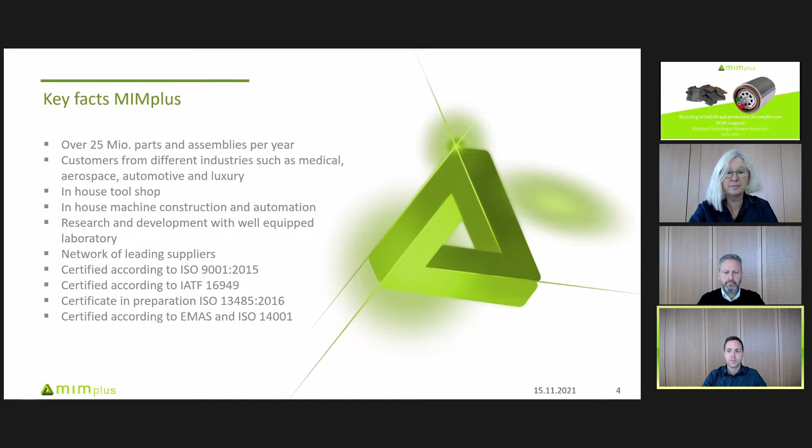So, the topic of our today's webinar is recycling of NdFeB and production of complex new MIM-magnets. I'm handing over to Carlo now, and enjoy the presentation.

Well, thank you, Sibylle, for the very nice introduction. It's a pleasure for me to talk today about the criticality of rare earth materials.

First, a little overview of the University of Pforzheim, which is one of the largest universities of applied science in Germany, with about 7,000 students on a campus overlooking the city of Pforzheim, with very new buildings. We just moved house with our institute from what you see down here to a brand new building. It is my pleasure to cover the third floor completely with our institute, which is called Institute for Precious and Technology Metals, short STI.

And our institute is based really on three columns. One is the contractual research and industry support. Here we have an accredited materials lab with a wide range of different technologies, ranging from high resolution to SEM to very specialized testing methods for the local precision and also the jewelry industry.

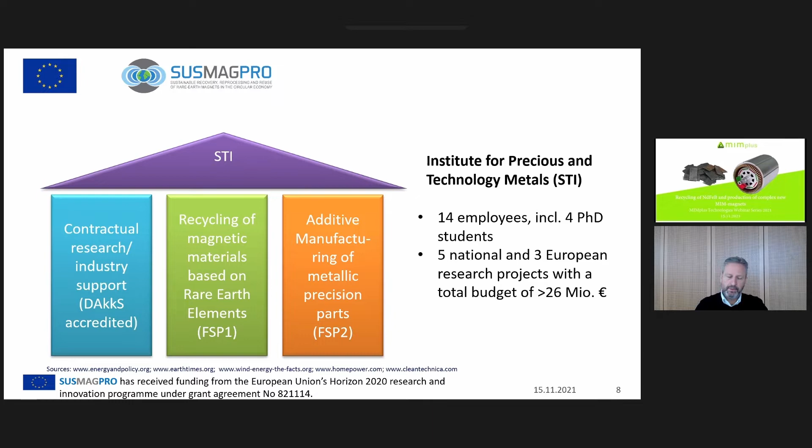We have 5 national and 3 European research projects with a total budget of more than 26 million. And well, I'm coordinating the largest one, which is SUSMAGPRO, which is sustainable production of magnets, or sustainable magnets production, to bring it in the right order.

And we are covering this subject because there's a real need to look into the recycling of rare earth materials. Because first of all, the green energy, and you know the discussions about the Green Deal we're having in Europe and about climate change, and green energy comes with a material revolution.

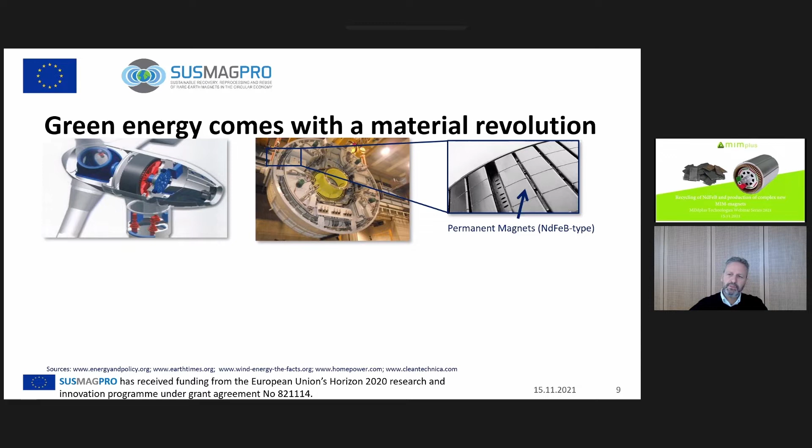There's a lot of talk about lightweight material, about composites, but a material that's really critical are the permanent magnets. And if you look into a wind turbine, you see in modern wind turbines, more than 2.5 tons of these magnets built in, so roughly about 650 kilograms per megawatt of power installed.

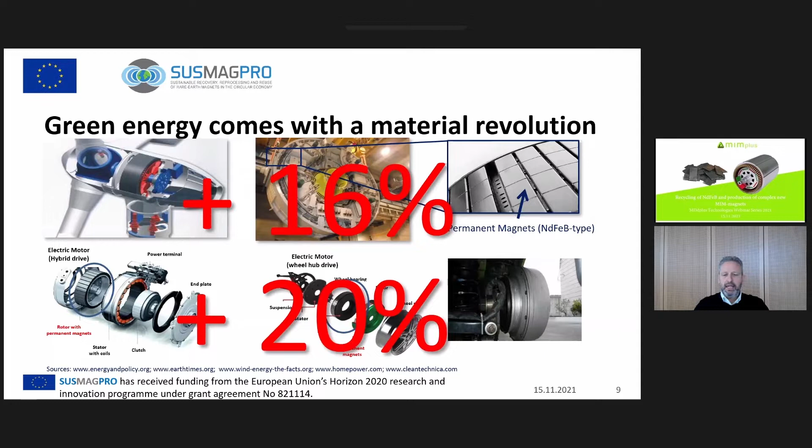If you look into mobility, in hybrid drives, you have about 1 kilogram of permanent magnets. In full electric cars, it can be up to 3 kilograms, so a much smaller weight per unit, but of course much larger quantities. And the growth rates in both areas are quite large. In wind turbines, currently about 16%. In electric vehicles, it's currently more than 20%.

If you look a little more into the newly registered electric vehicles, you see that in the last year, despite the COVID crisis and also systems like car sharing and so on, we have a massive growth in electric vehicles, which, if you look into the development cycle, leads us to suspect that we're in a kind of introduction phase of a new technology.

If you look, on the other hand, at the ratio of electric vehicle sales compared to total vehicle sales, we see that the growth is even further along, and that we are really in the growth-to-maturity phase already.

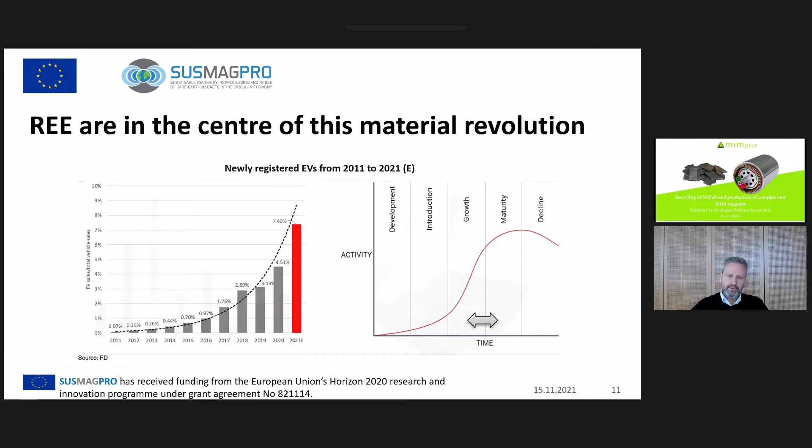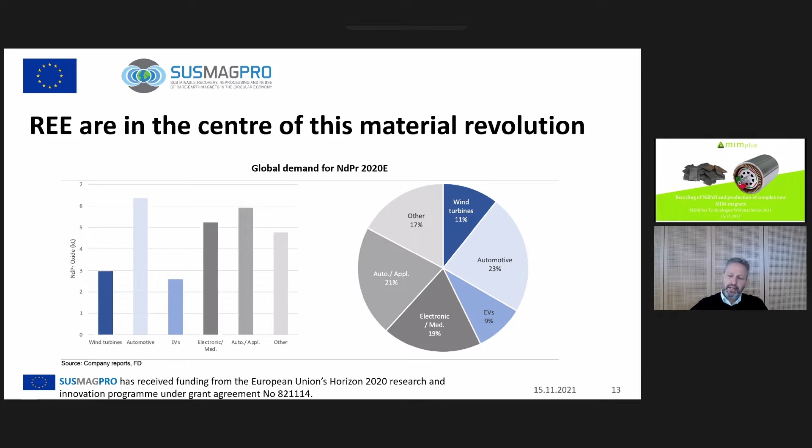The others, the 17%, are really toys, communication, and so on. So electric vehicles is only a small market right now because it's an emerging market, but we can say that over 80% of all electric cars sold in 2019 used permanent magnet-based motors, so-called PMMs. And all Chinese electric vehicles use PMMs because PMMs give you higher performance and lower weight compared with their induction competitors. This means longer driving range and smaller batteries, so that's a big leverage you have here.

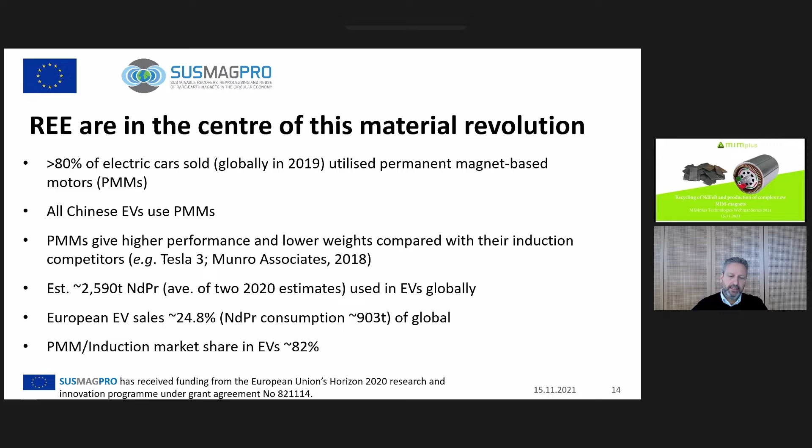Of the 35,000 tons that we've seen, only 2,500 tons are currently going into electric vehicles. And if you look at Europe, only a quarter of that is European electric vehicle sales. So we're roughly talking about 1,000 tons. Overall, the market share in electric vehicles is around 82%, but it's expected to grow massively.

If you now look at average growth rates of 10 to 15%, remember before I showed you 20%, this leads to enormous numbers. The increase between 2020 and 2030, if you assume nothing else is changing, is between 2,400 and 3,000 percent. And assuming zero growth in all other magnet-containing sectors like wind turbines, the demand growth of neodymium and praseodymium rare earths is between 130 and 190% above 2020 levels, always assuming this 10 to 15% growth.

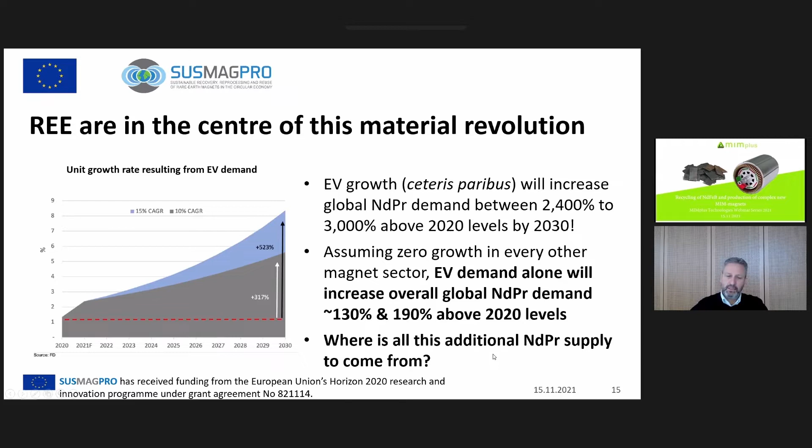The question is now, where is all this additional neodymium and praseodymium supply coming from? There are skeptics who say this takes much longer, and that some of the shortages in material supply will really limit the growth of electric cars.

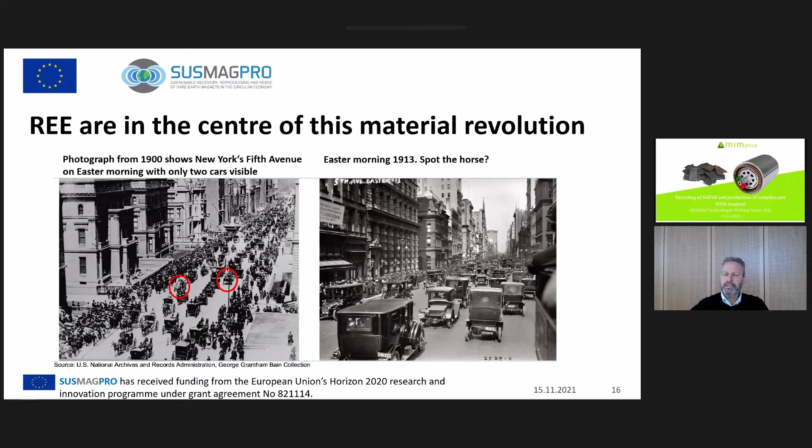Here I found a nice picture, which I've stolen from another presenter. It's a picture from 1900 of New York's Fifth Avenue on Easter morning, and you see there are only 2 electric cars, I marked them here with a red circle. Only 13 years later, same day, same road, the situation is completely different. As I spot the horse here, the horse is apparently there. I think if you look around, we see that the electric conversion of cars is already happening, and we see more and more every day.

If you look then into the value chain of the electric cars, considering only the rare earth elements, the value chain is quite a large one. You start with mining the rare earth elements, then you have the oxides, which you have to separate first, because usually rare earths come in a large variety. So you don't mine one exclusively, there's no neodymium mine or dysprosium mine, but it's always a mixture of them. You have to separate and refine them.

Then you have to make the metal. Then you have to make the alloy for the magnet, which consists of neodymium, iron, boron, and certain other alloys. Then you have to make the magnet, the component, and the OEM.

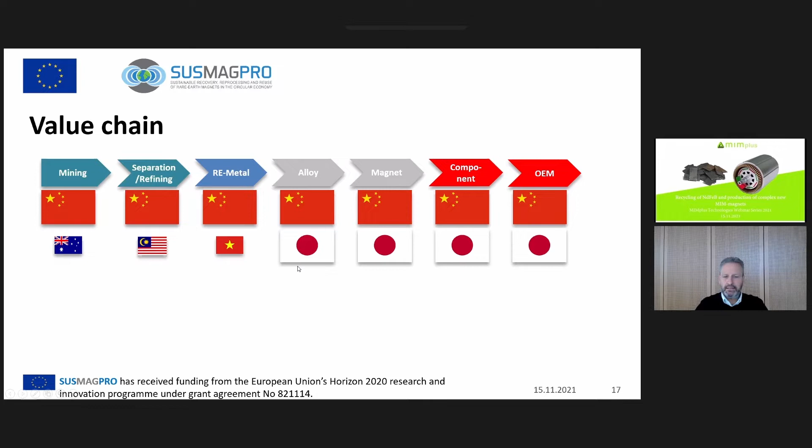And the Chinese, over the last 50 years, they have recognized that this is an important future market. And they covered the complete value chain, from mining to electric cars. And here, these flags represent the market share.

There's another supply chain, a Japanese one, with mining in Australia and refining in Malaysia. And there's another quite diversified value chain with mining in the USA, refining in India, and so on. You see European, or nearly European, players with the UK making metal and alloy, and some European magnet production mainly in Slovenia, coming out of the former Iskra in Yugoslavia.

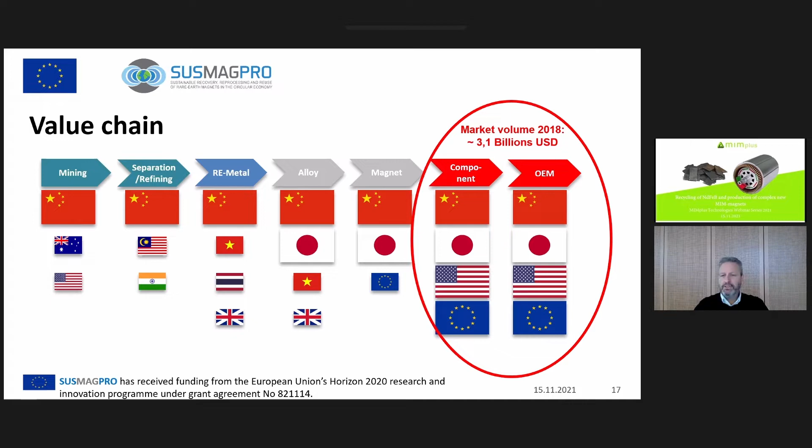But you see that on the component side, the US and Europe is as strong as China and Japan, in a market that is enormous, with $3.1 billion in 2018 and massively growing, as we've seen. This means Europe and the US have a significant disadvantage in getting this material supply.

If you look at the left chart, you see that over the years China has really taken over. In the 50s, Europe was dominating in rare earths. Then from the 60s to the 80s, the US dominated the market. And then, the blue one, you see that China has taken over nearly completely.

And in the last couple of years, Australia, which is the mine supplying the Japanese, is emerging and now coming up to quantities. But you see that we in Europe, we are up here. And this is why the European Union has classified the rare earth elements.

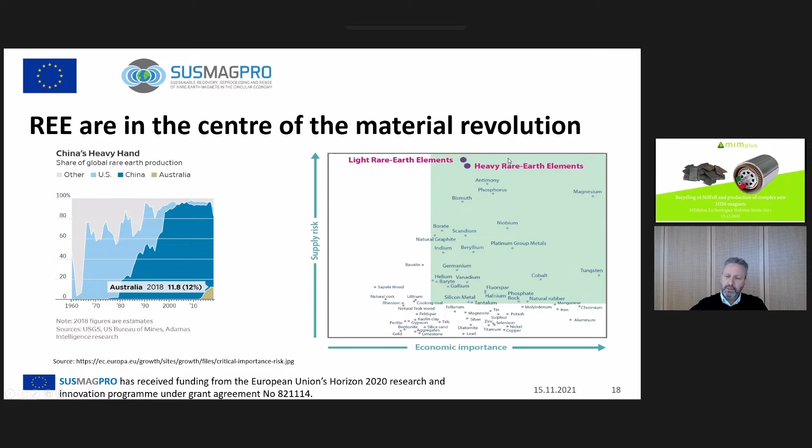Here one distinguishes between the light, which is neodymium for the magnet, and dysprosium as a heavy, with the highest supply risk and also significant economic importance, which is supposed to shift very much to the right side in the future with the European Green Deal.

And this leads us to where is the material for Europe coming from? Opening mines is relatively tricky, it takes a long time because it's open pit mining, so there's large land consumption. It also comes with chemicals involved, so water has to be treated, and also radioactive material is mined with it. So opening mines is relatively complicated.

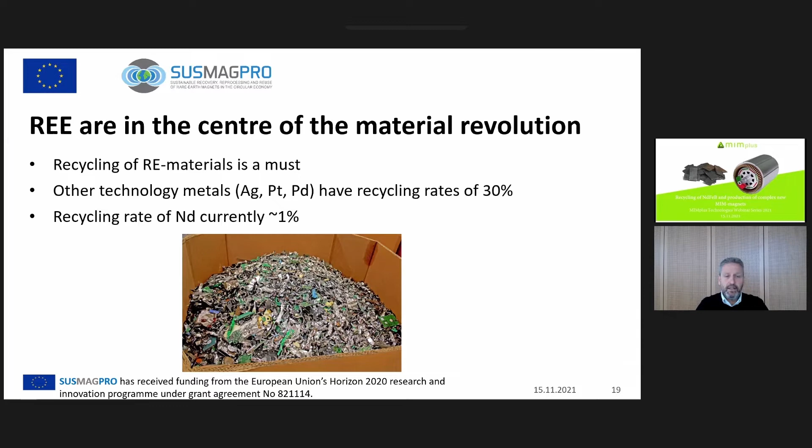And recycling, on the other hand, of the material that's already in the market is a must. Other technology metals, like silver, platinum, palladium that are in catalysts, have recycling rates of 30%. And neodymium has only a very little recycling rate of around 1%.

This, of course, has a reason, because end-of-life magnets, which I'll shorten here as EOL, come in a wide variety. So there's samarium cobalt, ferrites, neodymium iron boron in the market. They're all silvery and shiny.

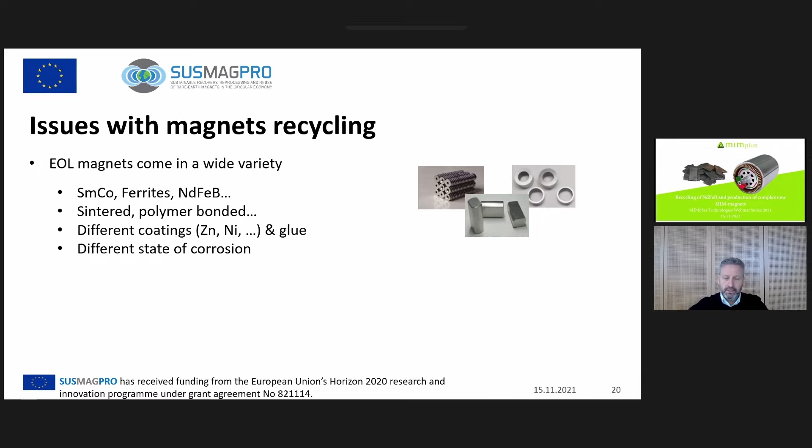If it comes down to neodymium iron boron, there's sintered bonds, which are good to recycle. Polymer bonded are not, but on the outside you don't see what's in. Then there are different protection coatings, which we will see later on when Johannes is presenting. They're complicating our life, and there's also a different state of corrosion.

Then on the market side, we have to state that the take-back schemes are not sufficient, and also the overall will to recycle is not sufficient. And this leads to a situation where a large fraction of our magnet-containing waste is still exported to third countries like Africa.

Another issue is that the magnet content in products is often low. For example, in the conventional car we've seen before, there's a certain amount of magnets in it, but it's dispersed all over the car, coming up to 200 magnets for window lifters, for adjusting the light, for adjusting the seats, and so the collection is very difficult.

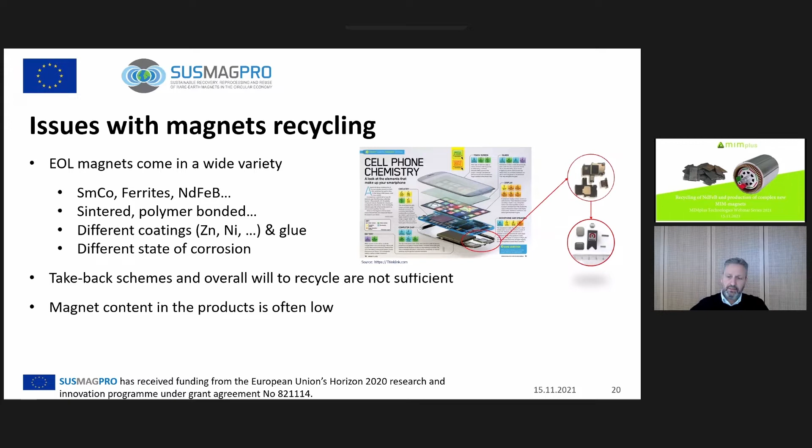And here, if you look into a cell phone, which originally cost 1,000 euros, the material value of the critical material is just 2 euros, of which 1.80 is gold, and only 20 cents is the rest of it.

So recycling methods do exist, but upscaling of these is expensive. And for the stakeholders currently, there's a large risk, because we don't know how the market, which is dominated by China, and also how the prices are developing.

This is why our largest project, as I said, is coming into play, SUSMAGPRO, which is an industrialization project. So it's not research, but developing and demonstrating in pilot plants that a clean and sustainable recycling of magnets is possible. The project is currently the largest European project on recycling, and it's covering the whole value chain, from the recycler like Stena to the end user like ZF for electric cars, or like Grundfos for heating pumps.

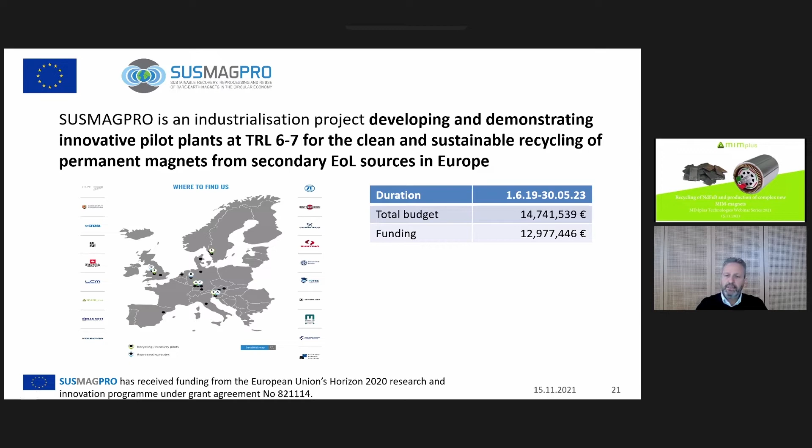The total budget is around 15 million, and as the industrial partners have to bring a certain own share, the funding we get from the European Commission is roughly 13 million. So what do we do in this project?

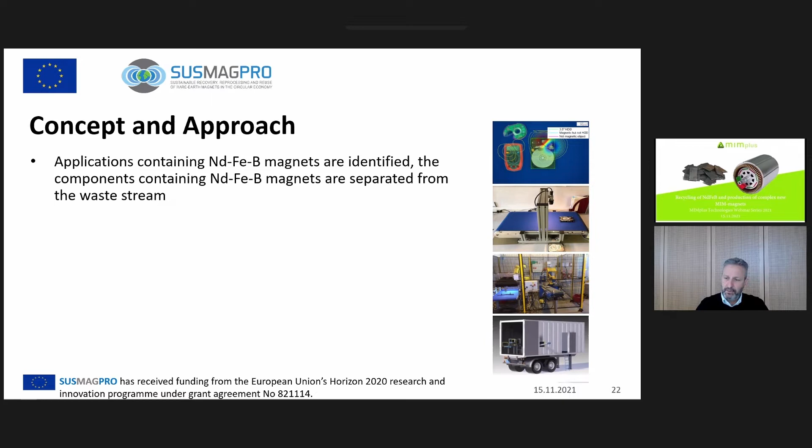First, we identify applications that contain neodymium iron boron magnets and develop methods to separate these components from the waste stream. This is mainly automation: with sensors we check where the magnets are and how strong they are, since neodymium iron boron magnets are the strongest ones, so they're fairly easy to separate. Then we build automation to take them out of the waste stream and cut off the magnets.

Once we cut off the magnets, we have to remove them from housings, glues, and mechanical fixtures, which can be easy in some cases and very complicated in others.

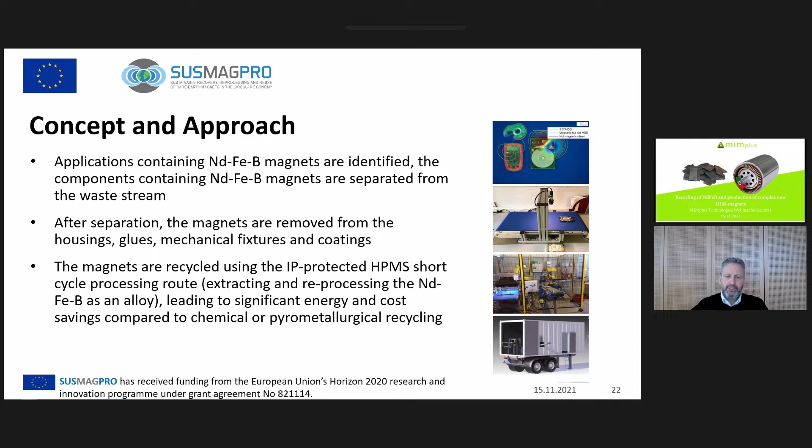Then the magnets are recycled using our IP-protected HPMS short cycle recycling, which is environmentally friendlier than other routes and has much less toxicity. This means we can do energy efficient recycling, making it fairly cost effective. The recycled materials are then reprocessed into new magnets through four different manufacturing routes.

So where are we standing? Currently we've looked at over 80, nearly 100 different applications, and we disassemble everything we can get our hands on, from audio modules in mobile phones up to traction motors, or what you see here, a steering column servo steering motor.

We classify them for accessibility, fixation, and contamination. A simple example: the steering column motor has a material value of 14 euros of rare earths, but takes 1 hour to access, roughly 40 euros worth of time, which leads us to assume this is not currently a resource that can be commercially recycled.

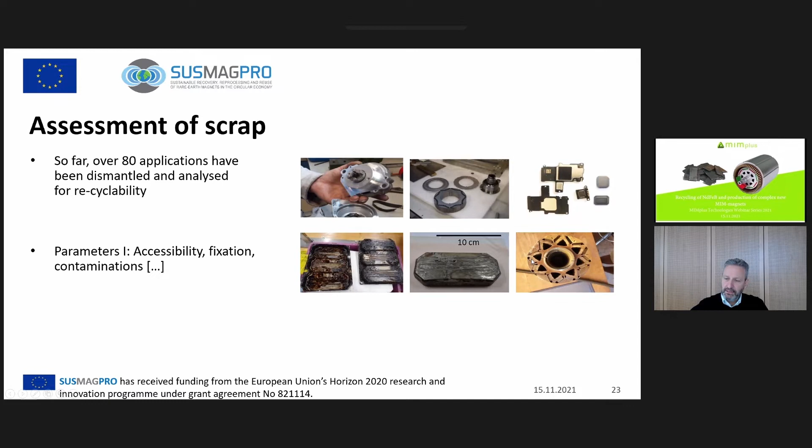Looking at fixations and contaminations, wind turbines are a perfect source because there are a lot of magnets in one place. But in this case the magnets are housed in a stainless steel casing and glued in with a glue that decomposes when you thermally demagnetize the magnet, leading to massive contamination. Or here you see traction motors where the magnets are fairly difficult to access or separate.

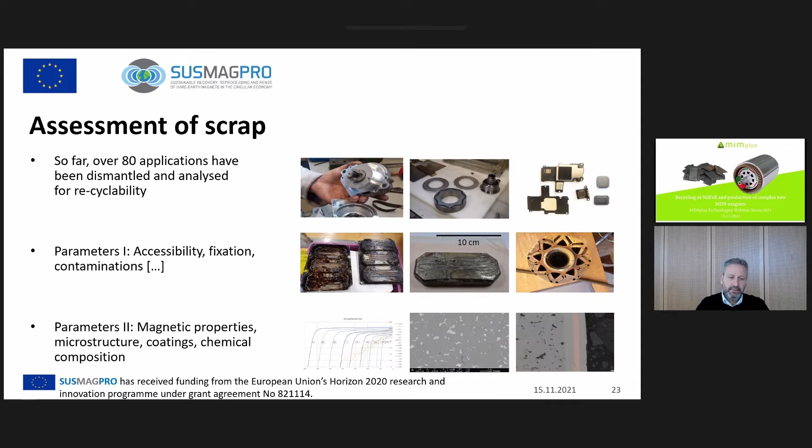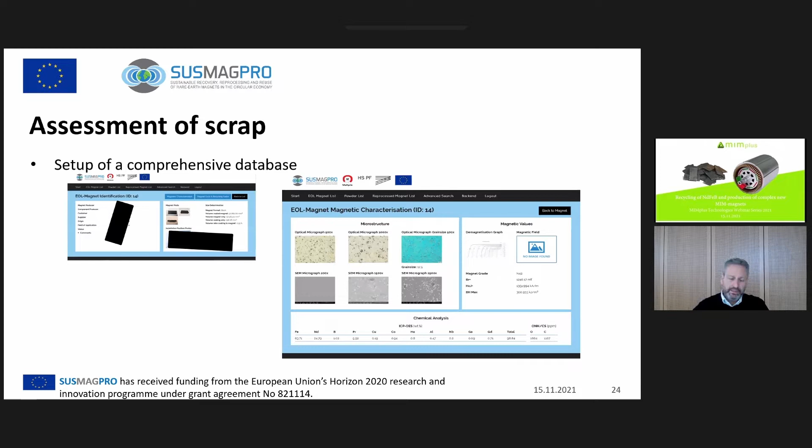The second parameter we look at once we've extracted the magnet is the magnetic properties, microstructures, coatings, and chemical compositions. This is all fed into a comprehensive database where we can access all the data, which helps us establish recycling factors and a labeling system, important for giving OEMs a hint on how to better design their magnets for recycling.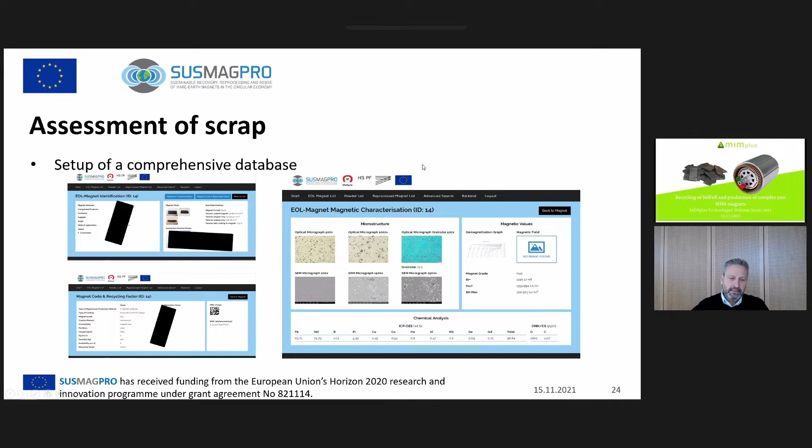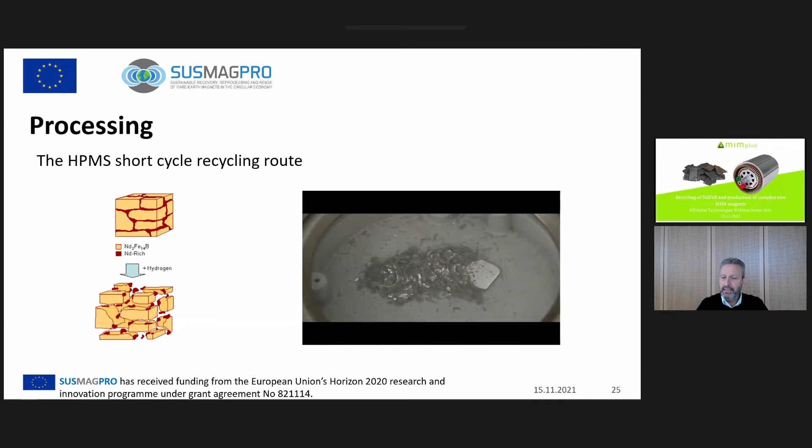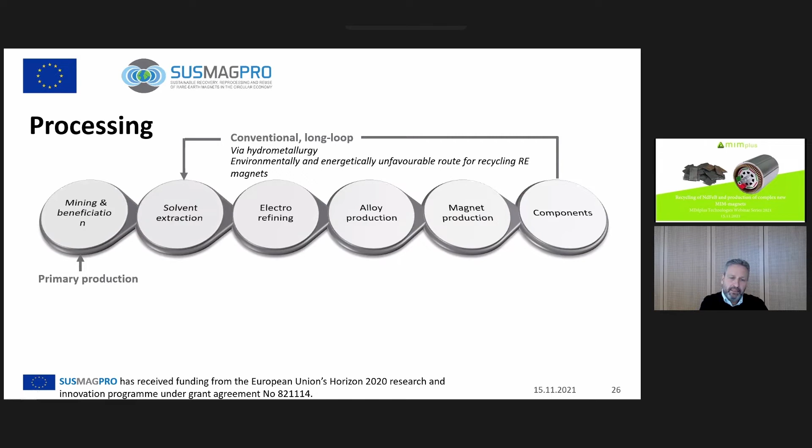Compared to primary production, which goes from mining through solvent extraction and refining to alloy and magnet production and then the component, and also compared to conventional recycling, where you go via hydrometallurgy back to the neodymium or dysprosium and then through refining and alloy production and magnet production again...

Our route with hydrogen allows us to do short loop recycling because we keep the alloy as a magnet, as a powder, which allows us to make sintered or polymer bonded magnets, or what we're talking about today, which Johannes will present: metal injection molding.

If the contaminations are too large, we can recast this material, remove the contaminations as a slag, add new alloying elements, and come up again with a high quality material.

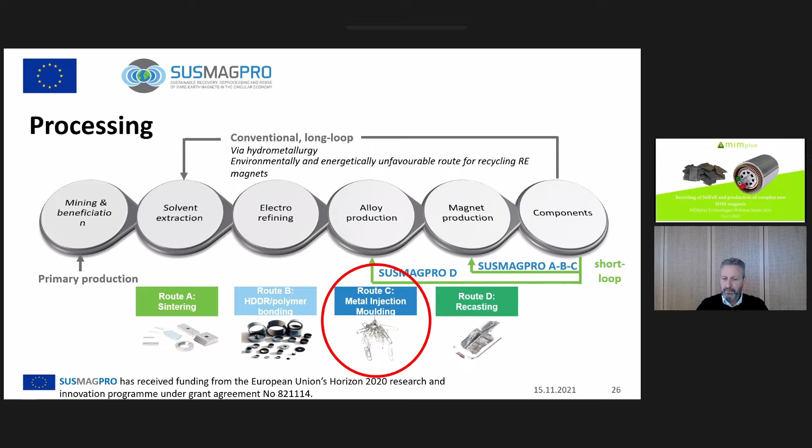But what we focus on today is metal injection molding, done by our project partner MIMplus. So I'm happy to hand over to Johannes, who will explain that process to you in detail. Thank you very much.

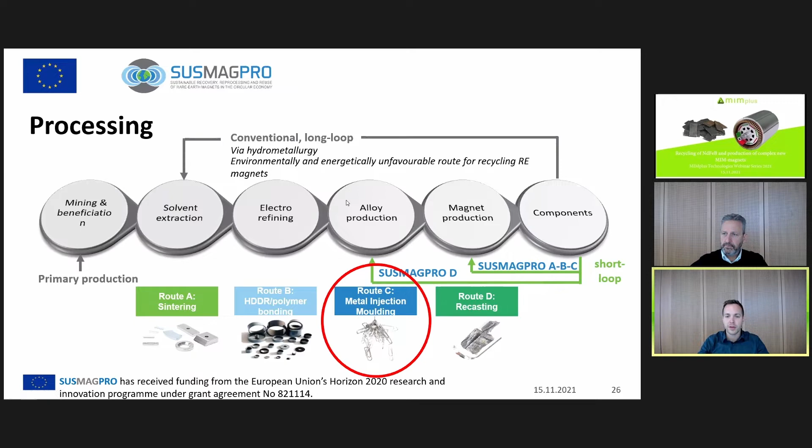Thank you, Carlo, for the nice introduction and your presentation about the criticality of rare earth elements and the SUSMAGPRO project. My topic today will be how to recycle neodymium iron boron magnets and the production of complex MIM-magnets with the metal injection molding process.

I will start with a short overview about the properties of neodymium iron boron, which is the strongest magnetic material known so far, for the strongest permanent magnets available.

Permanent magnetic materials have been developed over the last 100 years, with a lot of different alloys. But neodymium iron boron has the strongest energy product of all developed materials so far, even though the alloy is only roughly 30 years old.

If you compare the size of a magnet, a neodymium iron boron magnet is only 1/10 the size of a ferrite magnet, roughly 1/5 of alnico, and also much smaller than samarium cobalt, which is also a commonly used permanent magnet alloy.

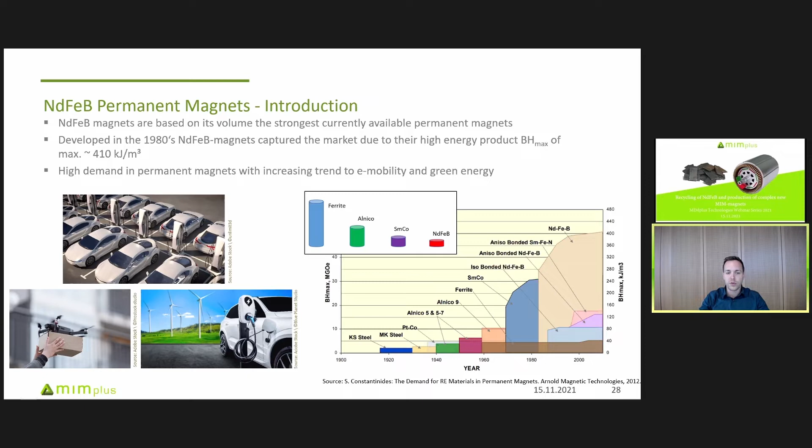Neodymium iron boron magnets are produced in two main state-of-the-art processes: pressing and sintering of larger blocks, producing the strongest magnets with the highest energy product available for permanent magnets.

But the problem is conventional press and sintered magnets can only be produced as larger blocks, which are not very complex. If you want more complex magnets, you need cost-intensive machining like EDM or grinding to realize shapes like arcs, rings, or other relatively simple geometries.

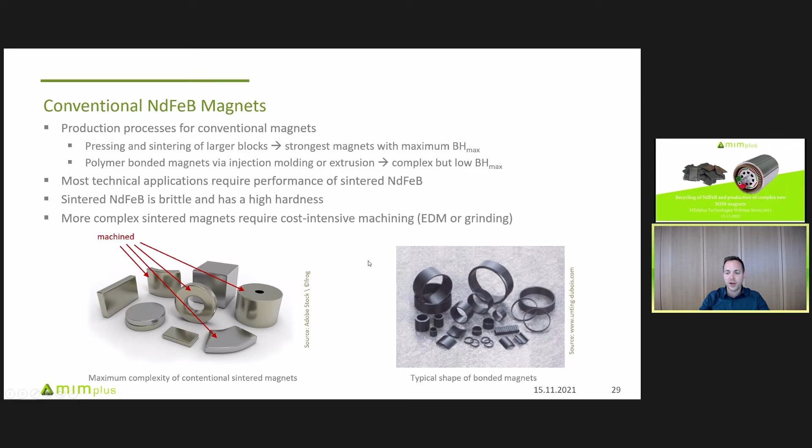The second state-of-the-art process to produce neodymium iron boron magnets is the polymer bonded route, where you disperse permanent magnetic powder into polymer, then use a shaping process like injection molding or extrusion to shape these polymer bonded magnets with higher complexity. You can also produce multipole magnets, but the energy product is quite weak.

Now we come into the game with the metal injection molding process. This process combines the sintered magnet route with the polymer bonded magnet route to produce sintered magnets with a complexity only known so far from bonded magnets.

This means the energy product and magnetic properties are the same as for sintered magnets, but the complexity is much, much higher. The orientation of the magnets can also be realized with greater freedom.

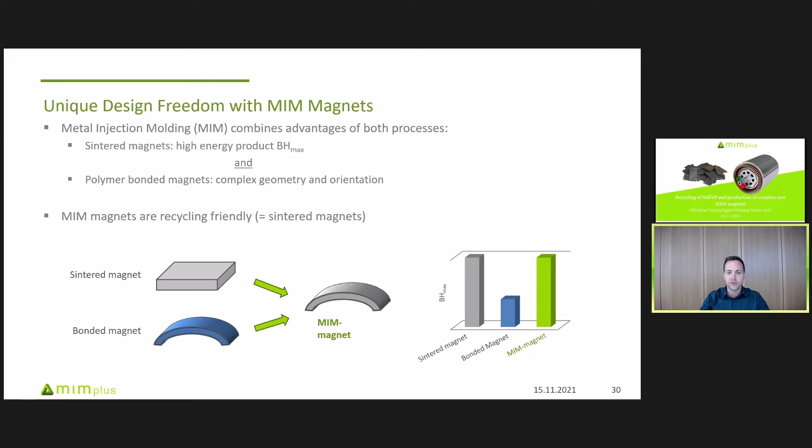To summarize: sintered magnets have low complexity but very high energy product and only simple magnetization. Bonded magnets can be produced with high complexity and complex magnetization, multipole magnets, but they have a low energy product.

In MIM magnets, which are sintered magnets but shaped with bonding technology in the liquid phase, you get high complexity, high energy product, and you can realize complex magnetization.

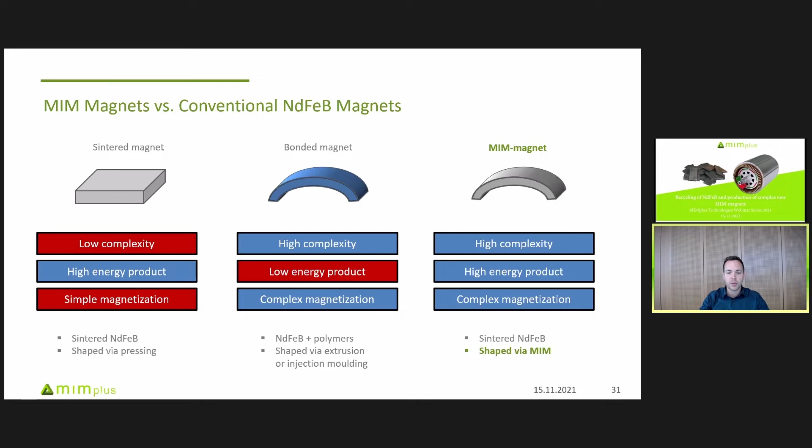Our vision is to introduce the MIM process into a closed loop recycling process. At the moment we start with virgin material or end-of-life magnets, produce the magnet powder, use the MIM process to produce complex shaped magnets, use it, and we envision that in the next 5 to 10 years, end-of-life magnets will come back, closing the loop.

We know at the moment there's no working collection process within Europe, but as Carlo mentioned, there's high demand, and we are honored to develop that within Europe during the next years.

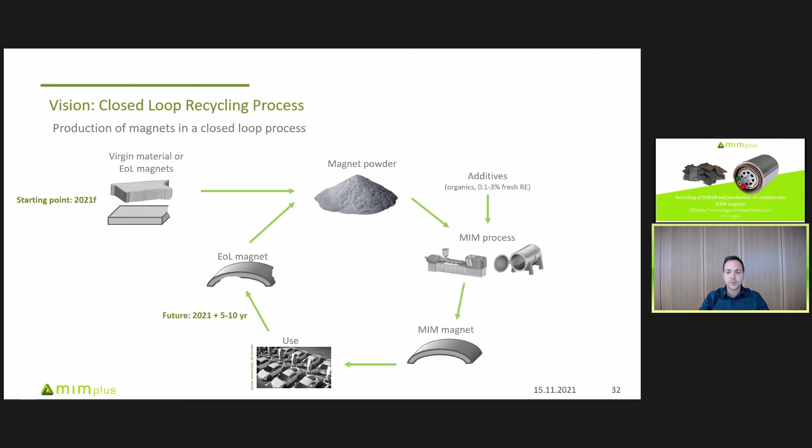At MIMplus, due to funding from several European R&D projects over the last years, we focused on production of complex shaped neodymium iron boron magnets with the metal injection molding process, building up the whole process chain in-house.

We can produce MIM magnets from virgin material, but we also have the closed loop recycling process to produce MIM magnets with similar performance as end-of-life magnets, in-house with our process chain. As Carlo mentioned, we are part of the SUSMAGPRO project, and we built up a recycling and reprocessing pilot plant at MIMplus.

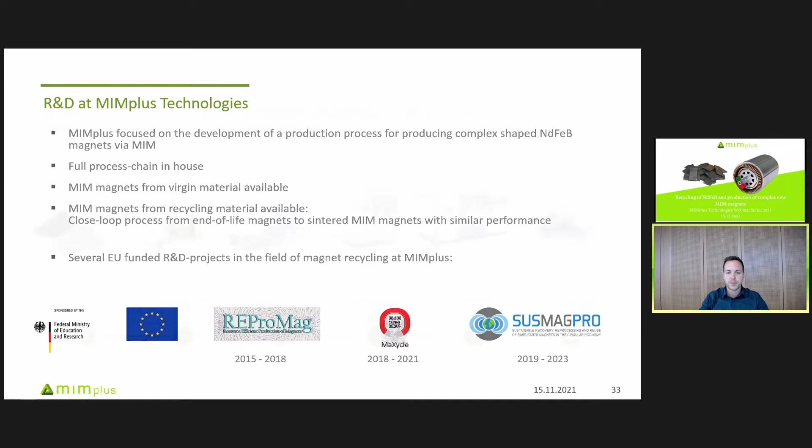I'd like to introduce the metal injection molding process generally first. This works for a lot of different materials—stainless steel, titanium, but also neodymium iron boron—and I will explain it in more detail based on neodymium iron boron in my next slides.

First, MIM is a powder-based process. You have metal powder mixed with a polymer mixture at elevated temperature to make the so-called feedstock—a mixture of metal powder dispersed in the feedstock. You get pellets that can be fed directly into injection molding machines and shaped with conventional injection molding machines known from the plastics industry. Then you get the complex shaped green body, which still consists of 80 to 90% metal powder and 10 to 20% binders.

These binders are first partially removed by the debinding process, and then only one third of the binder is still in the part. Then thermal debinding and sintering follows, where the residual backbone binder still in the part is decomposed completely, and in the sintering, the open porous structure is transferred into a 100% metallic part. There is no organic carbon anymore in the part, and it's nearly 100% dense, meaning we have a density larger than 96% in general.

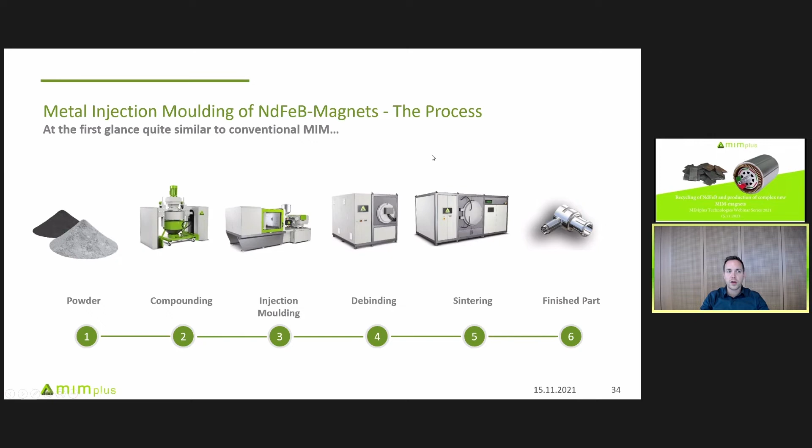At first glance, this process can be quite easily transferred onto neodymium iron boron, but in reality it's quite challenging, because the property of neodymium iron boron is highly pyrophoric if you use small powder. It starts to burn, it starts to glow at room temperature if you don't protect it, for example with inert gases or appropriate containment systems. That reactivity of the powder with oxygen, nitrogen, and carbon makes the MIM process quite critical for working with that powder.

Because MIM is a binder-based technology, we use organic binders. These organic binders easily react with the neodymium, which makes it quite complex, as you will see on the next slides. Furthermore, neodymium iron boron alloys often contain hazardous elements like cobalt, so you need special process equipment and special process know-how to work with that reactive and sensitive product.

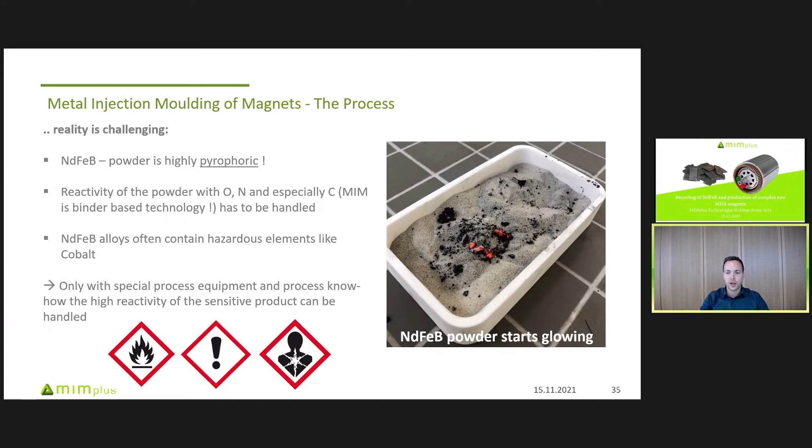That leads to challenging steps over the whole process chain, starting from the powder, because it's highly reactive, coming to the compounding, where you still have to work with the highly reactive powder. Then the injection molding, which is a bit special for neodymium iron boron magnets because you need an alignment system for the magnetic alignment of the part during injection molding. The debinding is not so complex, and then the thermal debinding and sintering step follows, which is a really critical step because you have to prevent the powder from reacting with light elements like carbon or oxygen. And then in the end, you have the finished part.

I didn't mark it as critical, but in the end it is, because you have to protect even the sintered magnets with corrosion protection coatings, because if you do not, they will corrode quite easily and fast.

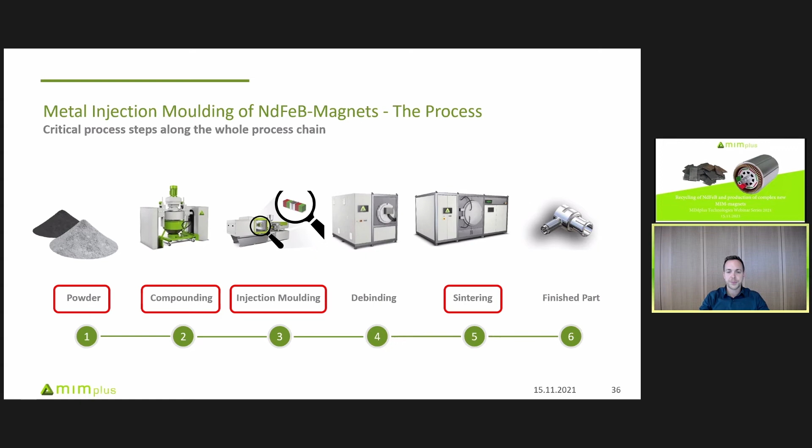I'd like to start first with the powder production. We start, for example, with end-of-life magnets. You have to extract the end-of-life magnets, for example by stamping them out of electric motors or by shredding smaller assemblies to extract the magnets. Then they are transferred into an HPMS reactor, where the so-called HPMS reaction follows, as Carlo introduced earlier, and I will show you on the next slide again. And then you get the clean NdFeB powder.

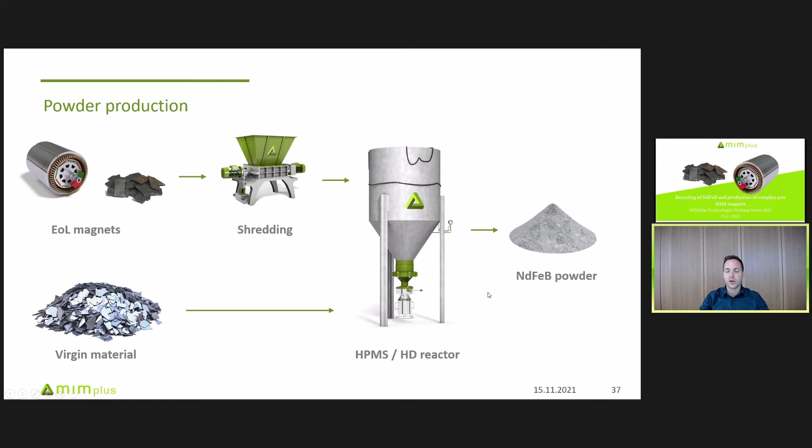A second approach is to use virgin material, where you directly feed the virgin material into the hydrogen decrepitation reactor, and you also get clean, fine neodymium iron boron powder.

The recycling route, as Carlo showed, is that you introduce a permanent magnet into a hydrogen atmosphere, then the whole magnetic microstructure falls apart, and you only have to guarantee to collect the powder and separate it from the coatings or other residuals like organic carbons, glues, resins, and so on that could be on top of the magnets. The clean powder can then be directly used for the MIM process.

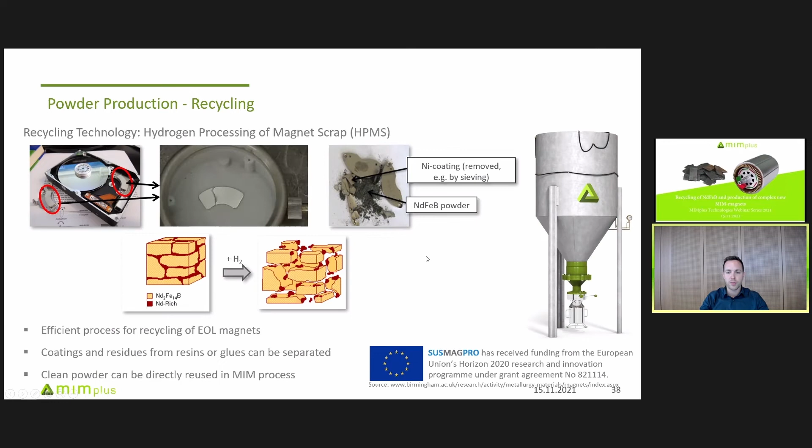If you use virgin material, you have two sources. The first could be ingots, just molten material cast into blocks, or you can use strip cast material, which is rapidly quenched molten neodymium iron boron alloy. You get it in small flakes, and this can be fed into the HD reactor, the hydrogen decrepitation reactor. Then you get the powder, which has to be processed, for example by milling, as is state of the art for pressed and sintered magnets.

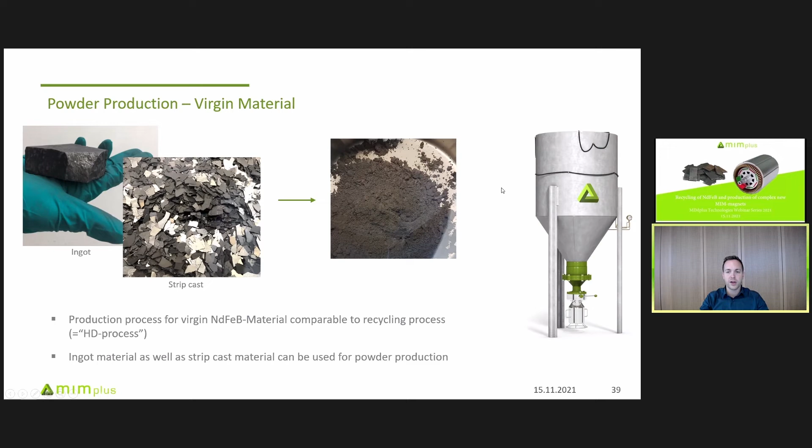The powder can then be used to produce the so-called feedstock. Therefore, we take the metal powder, mix it with suitable organic components, mix it at elevated temperature, and disperse it in a compounding machine. Then you get a good homogeneous mixture, the pelletizing step can follow, and you get a feedstock which looks like that.

In the feedstock, the polymers protect the powder, and it is quite comparable to state-of-the-art MIM feedstocks. But what's critical here is using appropriate binders and technologies to mix the powder with the polymers without reaction of the powder with carbon or oxygen, because it has a direct impact on the remanence and the coercivity of the sintered permanent magnets.

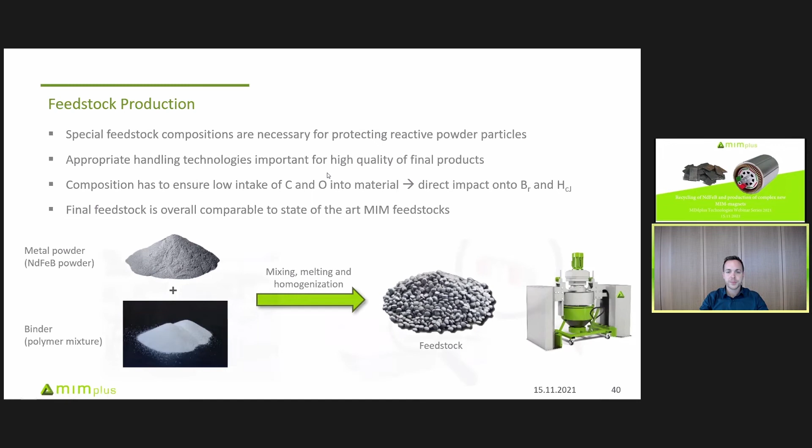After production of the feedstock, the injection molding step follows, which is well comparable to conventional MIM, conventional injection molding. You can use conventional commercial injection molding machines, but the specialty is in the MIM molds that are used. We produce them in-house at MIMplus.

We developed the know-how to produce these because you have to integrate a permanent magnetic field into the mold, to allow for alignment of the particles in the magnetic field to produce magnets with the highest performance, which are anisotropic magnets.

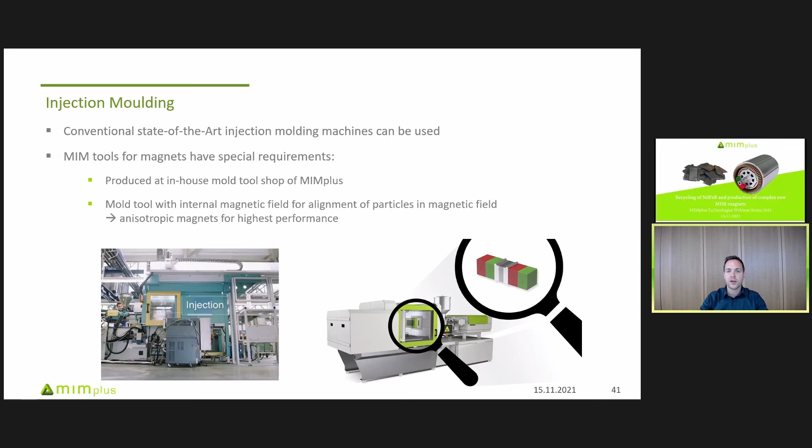If you take a closer look at a tool and the feedstock, you can imagine that every single powder particle shown here behaves like a single magnet. And if you put a magnetic field onto that feedstock, you get an alignment of the particles, and the particles are pre-aligned in the feedstock.

The feedstock solidifies, and the pre-alignment is stable in the produced green part. Then you can produce so-called anisotropic magnets. This pre-alignment stays stable until you reach the sintered magnet in the end.

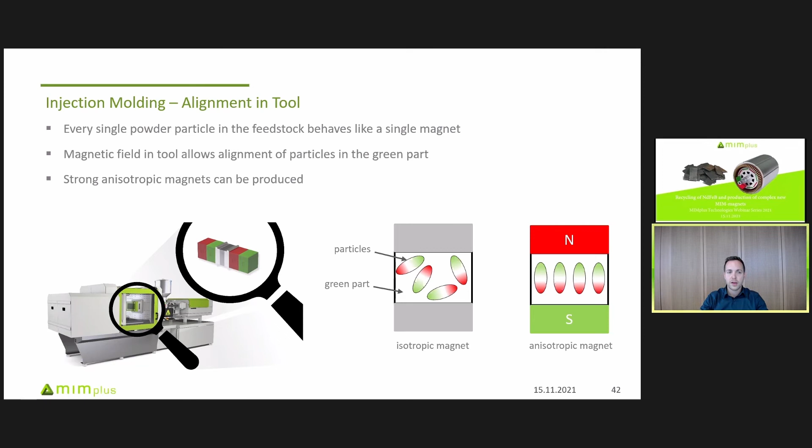A second point, which is quite interesting in the alignment and which is innovative for production of MIM magnets, is that we can realize multipole magnets like diametrical, radial magnets during injection molding. Even Halbach arrays can be produced.

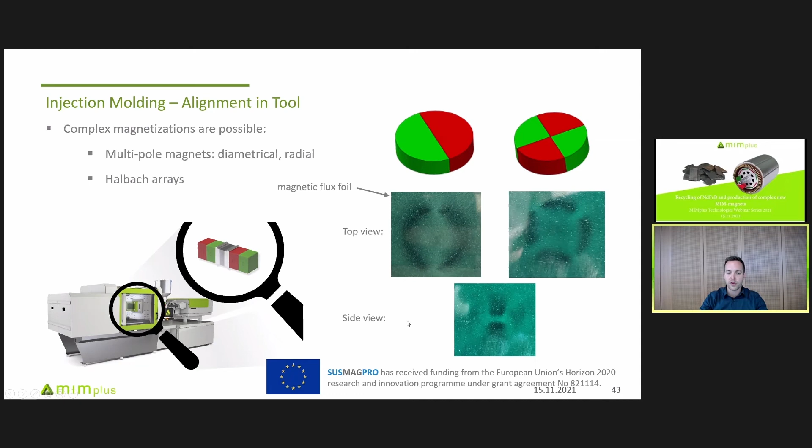Here shown are two examples of a multipole magnet. We see here the green part shown with a magnetic flux foil. You see here one pole, here the second pole. Here it's a 4-pole magnet: 1, 2, 3, 4 different poles. And on the side, you see also the magnetic poles of the produced green part.

After production of the green part, the so-called pre-debinding follows, which is well comparable to conventional metal injection molding. You can use, for example, organic solvents that allow extraction of the binder without reaction with the powder.

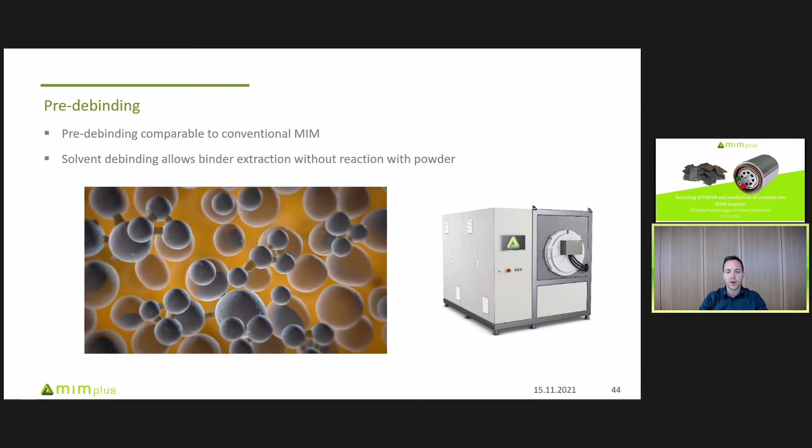The extraction of the binder means removing 2/3 of the organic binder which is in the feedstock. What will be left, as shown here in the capillary bridges between the particles, is the so-called backbone binder, which ensures that the debinded parts are still stable and can be transferred easily to the next step, the thermal debinding and sintering, without letting the parts fall apart.

The thermal debinding and sintering step is one of the main critical steps in the whole process chain, because you decompose the remaining backbone binder in the open porous structure. There you need adequate thermal debinding procedures to guarantee that you don't have any reaction of the decomposition products with the highly reactive neodymium iron boron powder.

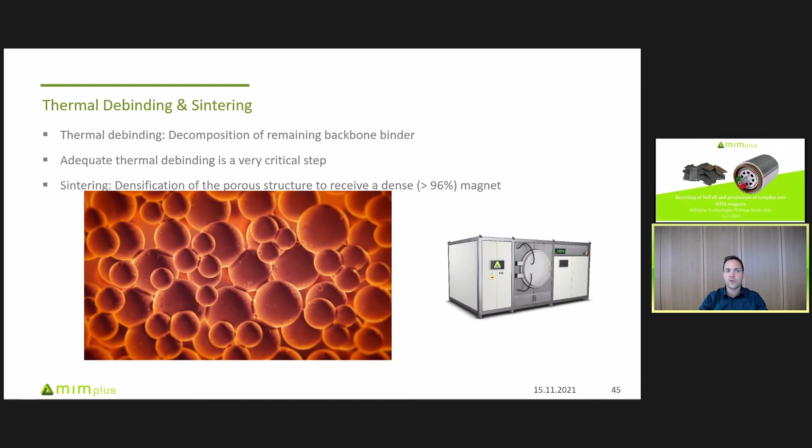And then after you deal with that, the sintering step follows, which is the densification of the porous structure to a >96% metallic and dense permanent magnet.

After the sintering step, you take the parts out of the furnace and they are non-magnetic. Then you can post-process them, for example with machining if you need.

But the advantage of MIM is that you don't need that, because we have high complexity. And then the magnets can be directly pulse magnetized to make them permanent magnets, or they can be coated with several state-of-the-art coating systems that are also state-of-the-art for sintered magnets, which have been on the market for several years.

Typical coatings are, for example, nickel-copper-nickel, or also tin-nickel, or nickel-and-silver, which we developed in-house at the OBE Group. We also have several sub-suppliers with whom we work together to coat our recycled and virgin MIM magnets.

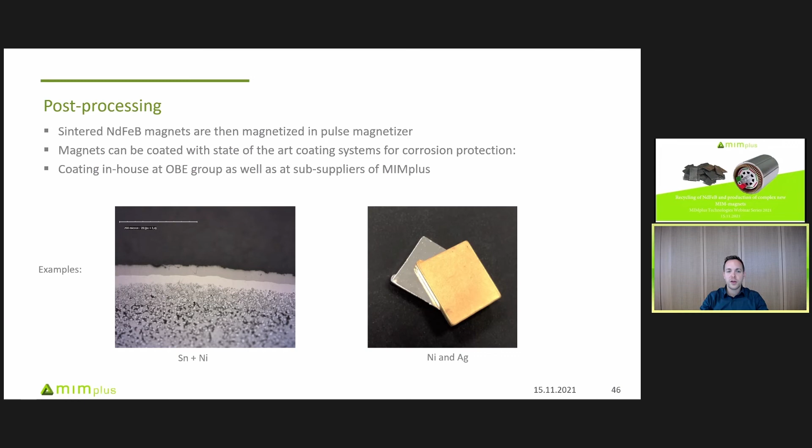Now I'd like to continue with several case studies to show you where the metal injection molding route can be applied. I would start with the recycling process of out-of-specification magnets.

We received these magnets from a magnet assembly producer. The magnetic components haven't been in the range where he wanted to have them. Then we took the magnets, treated them with the HPMS process, and chose an appropriate strategy for removal of the coating, which was here nickel-copper-nickel.

We just sieved the nickel-copper-nickel flakes off. Then we developed a feedstock to injection mold parts, and the thermal debinding, sintering, and annealing process was adapted to that composition of the powder.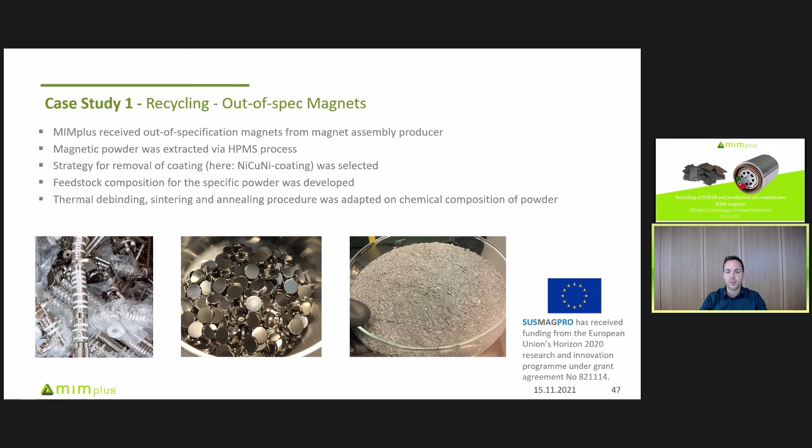If you have a look at the magnetic properties of the MIM magnets, the whole process was quite successful. You see here the starting grade was the N33SH. The blue line is the hysteresis curve of the part, and the red line is the properties we reached with the MIM parts. So we can say we reached, in this case, a remanence of 95% of the raw material and coercivity of 91% of the raw material.

And the microstructure of the MIM magnets is well comparable to that of the end-of-life magnet, the present sintered magnet, because we have sintered magnets but shaped in a more complex way. For our customer, this was quite sufficient because he wanted just to have the selling criteria of 100% recycled permanent magnets in his product. And you see here, it is reached easily.

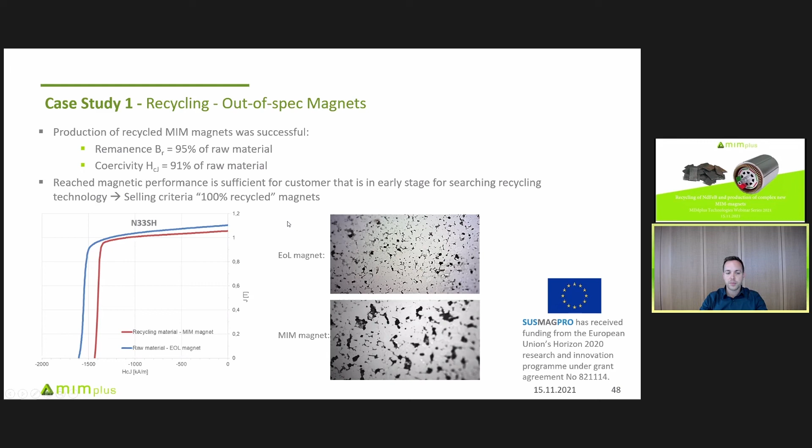The second case study I'd like to show you is recycling of end-of-life magnets, where the magnets were received from a scrap dealer. These were wind turbine magnets, thermally demagnetized, and the magnets were processed into powder and then used in the whole MIM process to produce MIM magnets.

For that case, it's the N38H alloy. We were successful in reproducing the remanence to 100%. It was here 1.18 Tesla, while the optimization of coercivity is still ongoing, which is more an annealing and thermal treatment process.

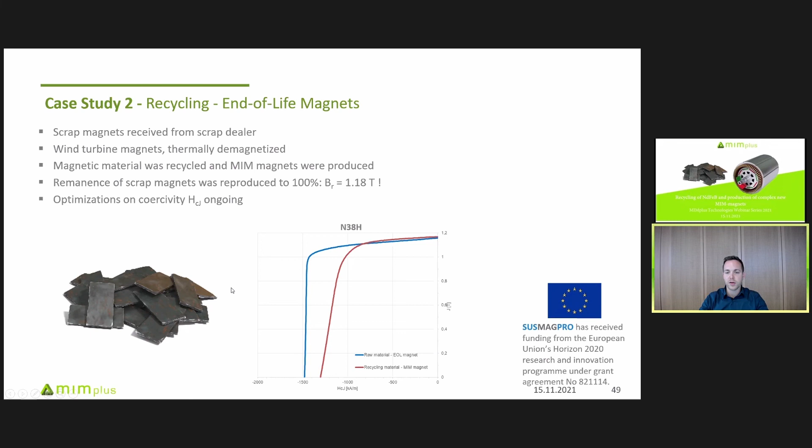A further case study is a magnet, a very thin magnet for electronic devices. Our customer wanted that we work with 100% virgin material. He doesn't want that we work with recycling material at the moment.

The magnet will come into a very compact magnet assembly that needs magnets with high performance, but with a thickness below 1 millimeter. That is quite critical if you look at conventional production processes, because there you produce larger blocks and then cut them via wire cutting, and these thin magnets are quite fragile, and you get a lot of scrap during wire cutting.

So the yield was quite low. With our MIM process, we realized we could produce the parts with one shot without any post-processing.

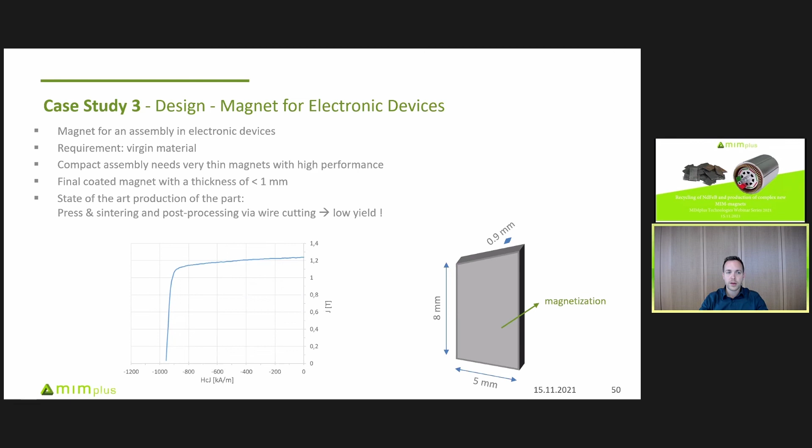A further case study is about a design - a holding magnet we already had in production at MIMplus. We produced a holding magnet for the furniture industry, which consisted of 3 different parts: 2 soft magnetic parts and one rectangular shaped magnet. All these 3 parts were glued together into a plastic tube, and that was quite cost intensive because we had to deal with 3 different tiny parts.

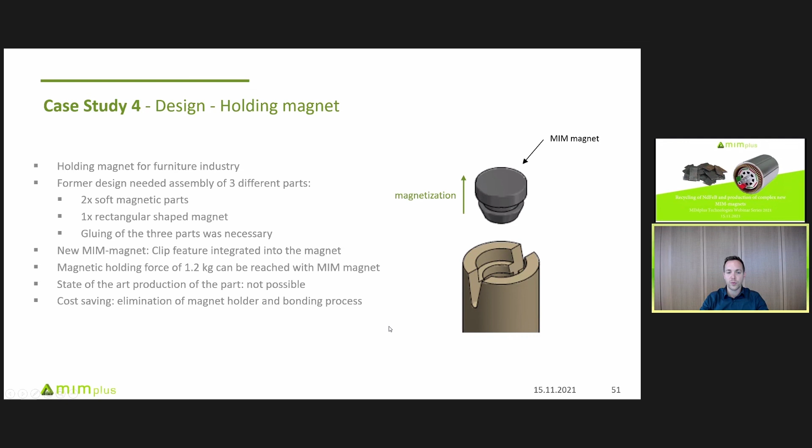Then we designed together with our customer a new MIM magnet with a clip feature directly integrated into the magnet. It was then possible to take the MIM magnet and just clip it into the plastic tube, so we don't have the cost-intensive assembly and gluing steps we had before. That design cannot be produced with state-of-the-art technologies so far - it's only possible by MIM.

The last case study I'd like to present to you is MIM magnets for e-mobility. Nearly all motor designers think in simple shaped block magnets for permanent magnet motors, and they think the rectangular shape of magnets is fixed. Typical challenges in electric motors are solved with design changes on other motor components, like the soft magnetic electric sheets, the power electronics and control system, or they change the motor design and the arrangement of the magnets, but they are all the time rectangular block-shaped magnets.

With our MIM technology, we allow for large-scale production of completely new magnet designs with so far unreached potential for motor performance. I have here one example out of the literature - it is a simulation.

Some researchers wanted to reduce the torque ripple effect in electric motors. They said, okay, how should the magnet shape look like if we want to minimize torque rippling? They got to this quite special freeform shape. They said, okay, nobody can produce that so far. How can we make it so it can at least be a bit produced by pressing and sintering, and they got to that shape.

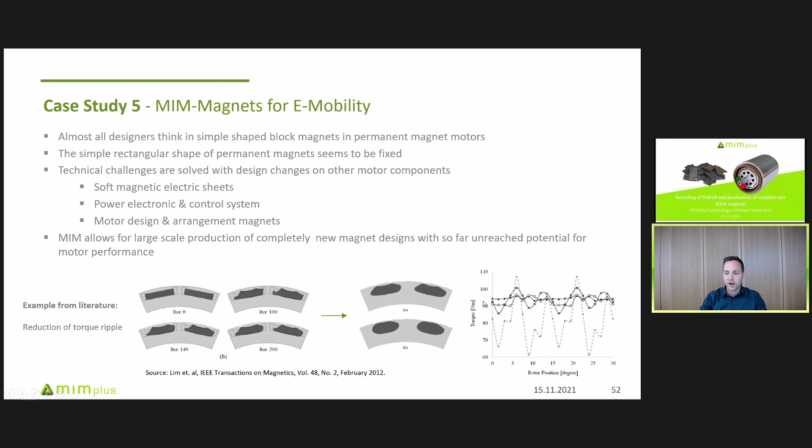But it's impossible to produce that in larger scale with pressing and sintering. These geometries could be ideal for the metal injection molding technology. With this optimization, you see here the green yellowish line - it's the torque rippling at the beginning of iteration 0. And these blackish lines are nearly without torque rippling after optimization of the shape.

I'd like to summarize my presentation today. I introduced the innovative MIM technology for production of neodymium iron boron magnets, for the production of permanent magnets and geometries that haven't been economical before. We can produce MIM magnets with a high freedom of design, with magnetic properties equivalent to state-of-the-art sintered magnets. We don't have any limitation on the magnetic grade or the chemical composition.

At MIMplus, we built up a closed loop recycling process for producing MIM magnets from recycled material and also from virgin material. This new innovative MIM technology for neodymium iron boron allows unique chances for all sectors, starting from the automotive industry, medical industry, aerospace, electronics, and consumer industry. Thank you.